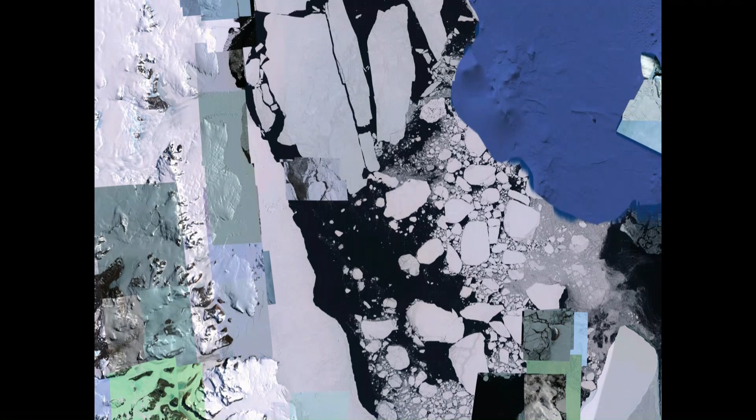But the sound could also be interpreted as a territory's response, or in a way the lament, to anthropogenic climate change, as it amplifies and echoes the sound of the formation of crevasses, and of the calving of ice that we all know is one of the quintessential markers of climate change.

Tonight it is a real honor to introduce to you an architect that has accepted the challenge of building on this living ice. A colleague who has understood that human presence in Antarctica, an achievement approaching its 200th anniversary in 2020, is essential to be in the position of building accurate scientific models that allow for reliable predictions of the future of our planet, and has therefore collaborated with countries and their respective scientific organizations to build scientific stations on the continent.

I'll refrain here from indulging in too long an explanation of the extraordinary site in which Hugh Broughton and his team have been working and operate daily, but I'd still like to show a few diagrams which were produced by some of the students I see here in the room tonight within the context of the recent AA Polar Lab workshop we conducted in collaboration with Accurat.

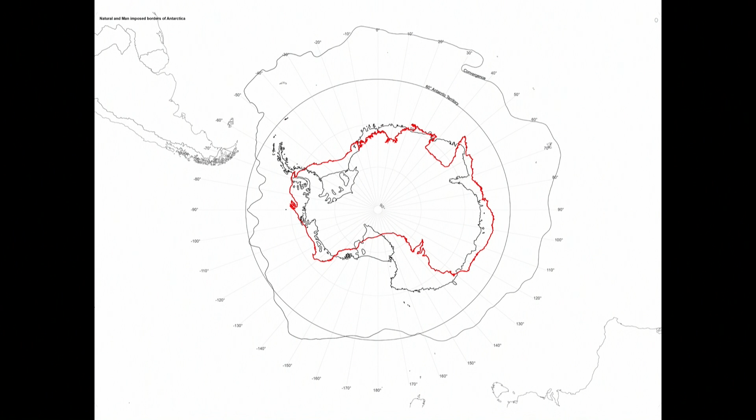Antarctica, really briefly, as you can see, is almost as large as Australia. Its territory is defined geographically by the convergence, which is ultimately a current, where the cold waters of Antarctica meet the slightly warmer waters of the sub-Antarctic. And politically, it is defined by the latitude south of the 60th parallel.

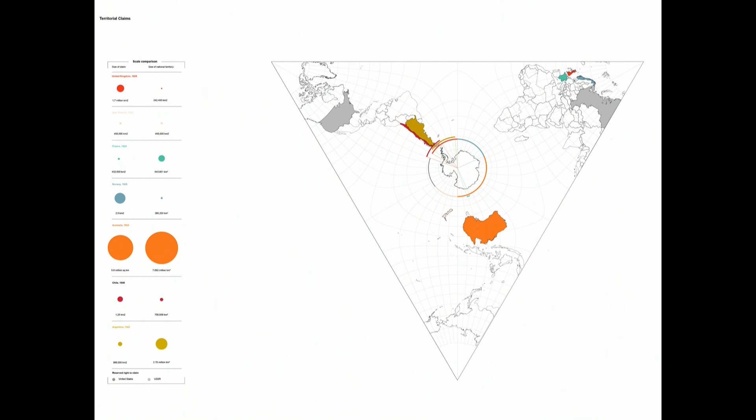The national claims that were made by 7 countries between 1908 and 1942 are somehow suspended since the signing of the Antarctic Treaty, which is effective since 1961. Here you see a first attempt at diagramming its operation, but basically it's a fragile governance system which prescribes that Antarctica is a territory devoted solely to science. There's no military activity allowed, and no resource extraction either.

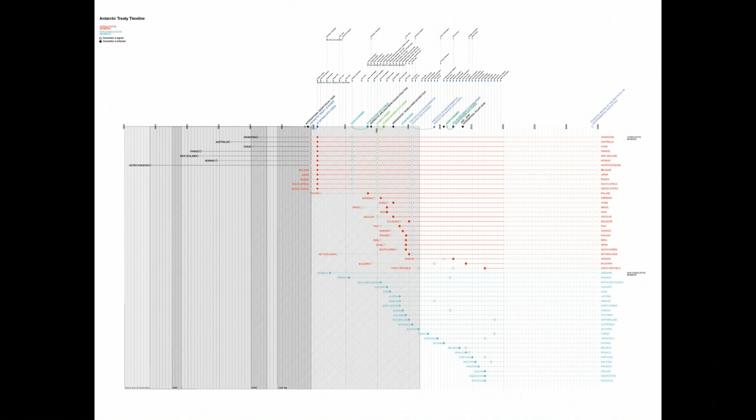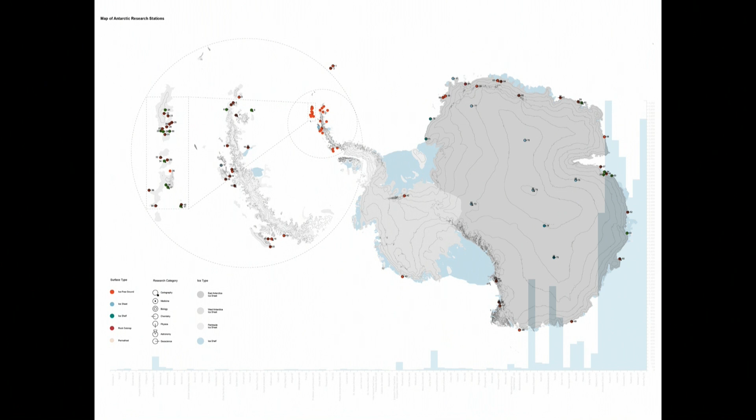But during these past years, 53 nations have in the meantime embraced the Antarctic Treaty system, leaving approximately 143 countries still unrepresented. The territorial footprint of these national investments is manifested in 77 research stations that you can see punctuate the continent, mainly on its coastline, but also within the middle of the territory. And most of these have been rebuilt or extended throughout the years, as this timeline attempts to show.

And most of them have also been built in proximity to historic sites and monuments, which are marked here on the map, and their respective protected areas. Some of these include, obviously, the heroic era huts that you might be aware of, Shackleton and Scott, just to name a few, but there's also a rather eclectic list of other artifacts which are part of this preservation list.

And yet most of the stations vary in typology. It depends primarily on the altitude where they are located, the climatic condition, and obviously the ground, or in some cases the ice, in very rare cases ice sheets, as we'll see with Hugh tonight, upon which they are built. They also vary in size and programmatic specifications, as well as number of buildings.

You can see on the upper left, for example, McMurdo Station. It's a US station. It's arguably a small town or a small city. It has many buildings. In total, there are 1,289 buildings in Antarctica, which account for a total surface area of approximately 211,000 square meters.

So let's say 3 Louvre, just to give a scale comparison. And all in all, they can host up to 4,800 people during the summer months. But how do these researchers live? How can architecture provide more than a temperature-controlled environment that allows for survival in such an extreme condition?

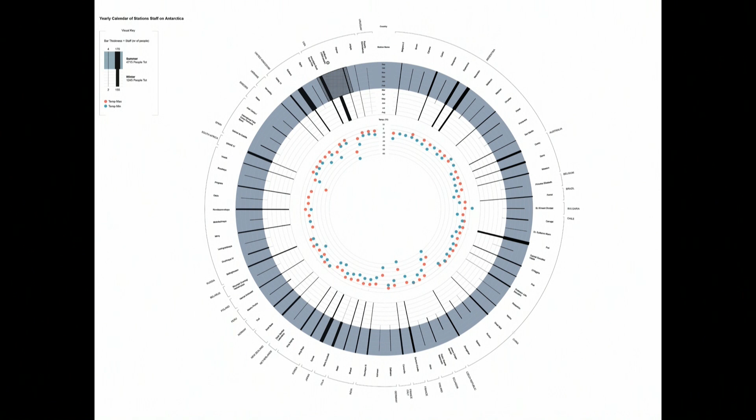So all of these questions were certainly answered or posed within Hugh Broughton's team and addressed while building Halley VI, which we will certainly see tonight, for the United Kingdom, Juan Carlos I for Spain, while redesigning or designing Comandante Ferraz for Brazil and Jang Bogo for Korea, and rethinking at present the Scott Base for New Zealand and expanding it, as I just understood, and Rothera again for the UK.

But given the trajectory of the Anthropocene and the ever-increasing possibility that humankind might have to inhabit exponentially inhospitable territories, I believe it's really a true pleasure to have tonight the opportunity to invite Hugh Broughton to share with us his experience on Antarctica. The unconventional brief that Hugh was confronted with offers new perspectives to our discipline and encourages the development of experimental prototypes, of which here at the AA especially we're immensely fond.

So it's a very real honor to invite Hugh up on the stage now to contribute not only to launch the AA Polar Lab session and conversations, but also to contribute to the new canonical history series of the AA. Please join me in welcoming Hugh Broughton.

Thank you so much. That was such a nice introduction, and I actually have to admit I learned quite a lot during that, so that was really cool as well. And some beautiful, beautiful diagrams as well of all the different stations that I could imagine will be very useful in some of our presentations in months to come.

My brief this evening is to talk to you about the extreme challenge of building in Antarctica, drawing upon some of the experience we've had over the last, it's now 15 years since we very first became involved in the Halley project, and then working on other projects since. Of course, I'm sure you're all aware, Antarctica is the coldest, windiest and driest of the continents on Earth, and yet holds 90% of the world's fresh water within its region.

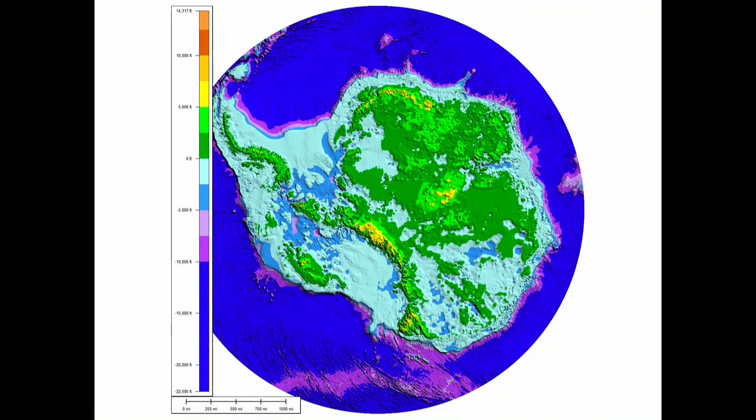This is in fact an aerial view of the Antarctic taken by NASA, and you can see those areas which are green, which hold land underneath, and those areas which are light blue and darker blue, which are essentially ice shelves, which is thousands of year-old ice frozen between the land masses. And there is a popular thing that you can do looking up on the internet, what happens if all that ice were to disappear, and this would be the archipelago that we would be left with.

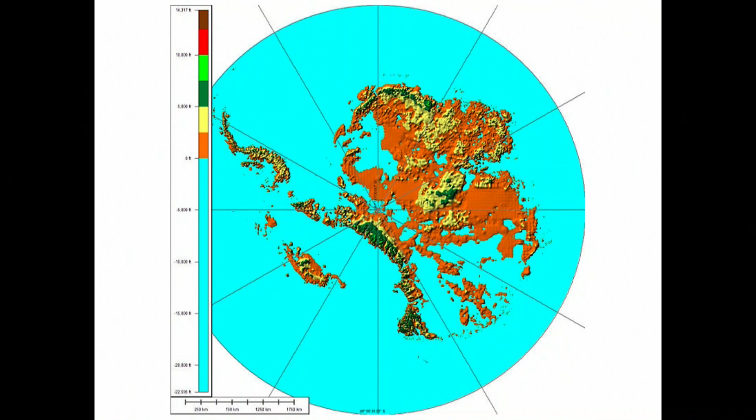The reality is that if all that ice melted, then sea levels in the world would rise by around 60 meters. But the safe aspect of that is that it would take in excess of 5,000 years for all that ice to melt. So it's not something that any of us will probably experience. But what we may experience is the demise of large sections, and in particular the Western Antarctic ice sheet, which is one of the most dynamic in the Antarctic continent, and which is held in place by a series of glaciers that, if they were to disappear, would allow the ice sheet itself to start moving at great speed into the ocean. And that in itself could lead to sea level rises of around 3 meters, which may not sound so much in the context of 60, but certainly would have a significant effect around the world.

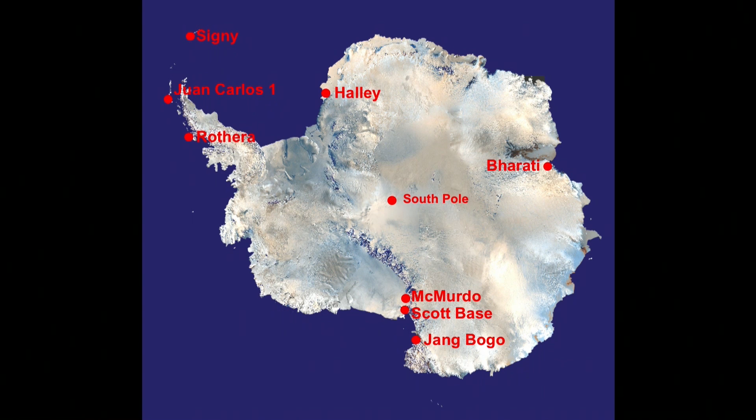From our own perspective, we've been very lucky to be involved in a series of different stations at different levels. Most of them have involved some degree of architectural competition, and probably more than half of those we've lost. So it might look like a lot, but actually in the end there is certainly a good chunk that we have been involved with, but others which we've spent months and months preparing proposals for that have then led to other people building them.

The one I wanted to focus on in particular is the British station, Halley Station. We designed Halley 6. That's because there were 5 before, most of which disappeared. They were either buried or the last one had to be dismantled. Halley is a really unusual location.

And the other 2 buildings, the Piggott and Simpson platforms, were where the science was conducted. So one did near ice science, and one did atmospheric and outer atmospheric science. And one of the key social issues of the base was that there were 2 groups of scientists studying relatively related subjects, but working totally independently. And that was, alongside the technical challenges, one of the social challenges that our project presented.

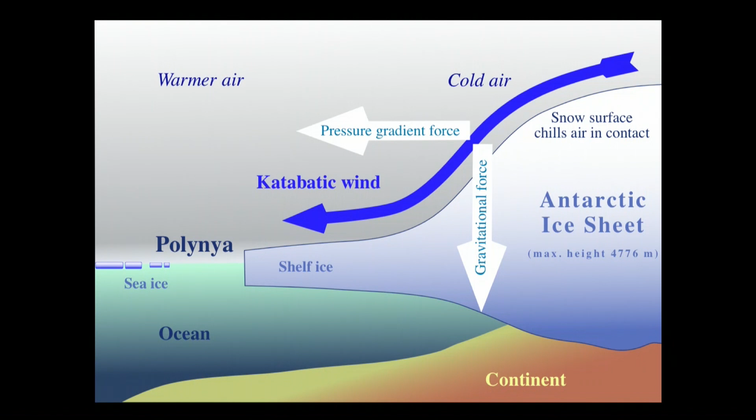So the challenges of building in the Antarctic are obviously pretty apparent, the coldness in particular. Temperatures at Halley go down to around minus 55 degrees Celsius. There are other stations that are colder. Vostok Station, for example, I think has had temperatures down to at least minus 90, and at the South Pole also there are temperatures in the minus 80s. But minus 55 is still pretty cold. Everything will freeze, your eyebrows, your breath, everything at that temperature.

In the middle of winter, the snow and ice will freeze solid on anything you leave outside, so your vehicles that you're using in the summer become totally unusable in the middle of the winter. And then in the summer, when the temperatures rise, the regularity of high winds also increases, and wind speeds at Halley in excess of 100 miles an hour, or around 150 kilometers an hour, are not uncommon. And they will carry significant drift with them.

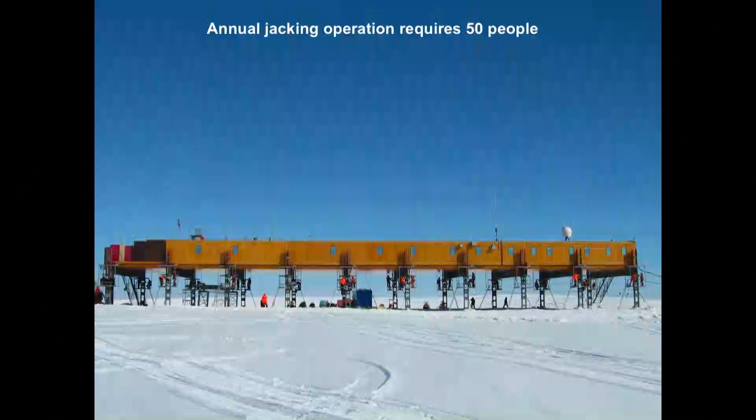So every year at Halley V, it was necessary to jack the building up to account for the rising snow level of 1.5 meters. And the way that that was done is that they would create baskets using scaffolding tube around each individual leg, and then there were small electric engines that would then be put on the legs, and they would just jack the steelwork up within that leg, and you would have to put bolts in, then jack it a tiny bit more, put the bolts in, move them up, jack it some more.

And it was a really laborious process. Took at least 2 or 3 days just for this building, and a day each for the other buildings, but involved every single person on base. All science had to stop, all other operations had to stop. Obviously, you're working with steel bolts and things. When we went on a visit, we had to help with this process. And it was really time-consuming and extremely cold. Fine when the sun is shining on you, but the sun tracks around the building. And when the sun moves off, then you get incredibly cold when you're doing this process.

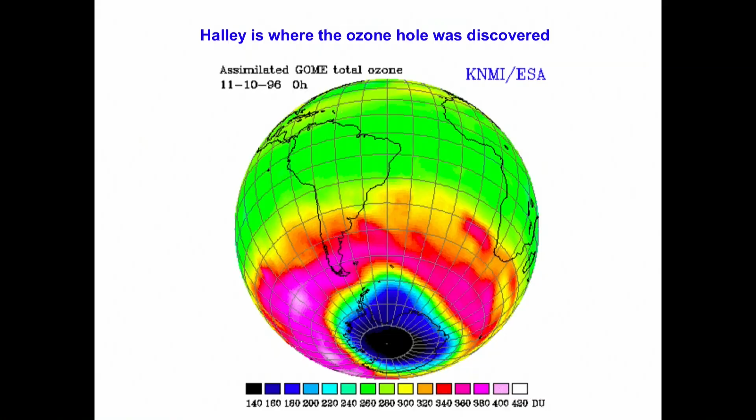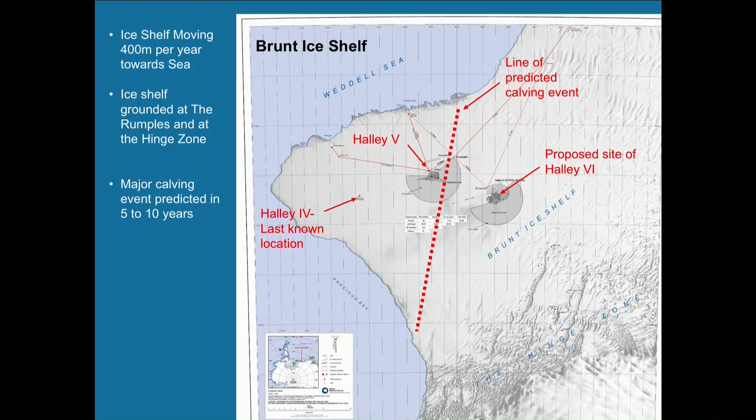And as a consequence, the British Antarctic Survey decided to hold, it was a first for them, an architectural design competition for the new station. So they put out an international call for multidisciplinary teams to come up with combined engineering and architectural solutions. And they had around 90 entries initially. It was quite funny because at the time we were just a practice of 4 people, working out of a small shed in West London. And I remember hearing on the radio about the requirements for the architect they were looking for. They had to be multinational, multidisciplinary, world leaders in sustainability, world leaders in prefabrication. And I remember listening to all 4 of them and thinking, well, that's so straightforward, because I am not able to do any of those things.

But still, I went along to the launch, and I met an engineer from AECOM, who many of you may know is a big global engineering consultancy. At that time, they weren't into architectural competitions in any way. And he sort of pleaded with me to enter with us, and I pleaded with him to let them lead the bid, which eventually they did. And we were really lucky. We found an engineer based in Colorado Springs in the US who had spent his whole life working on the American polar program.

And we paid for him to come over to the UK for 48 hours, and he gave us a kind of crash course in all the things that you should and shouldn't do in Antarctic design. And he made sure that our naturally ventilated building with wide opening windows bit the dust as quickly as possible. And eventually we got the core basis of a design together, and it was, I guess, from that springboard that we eventually won the competition.

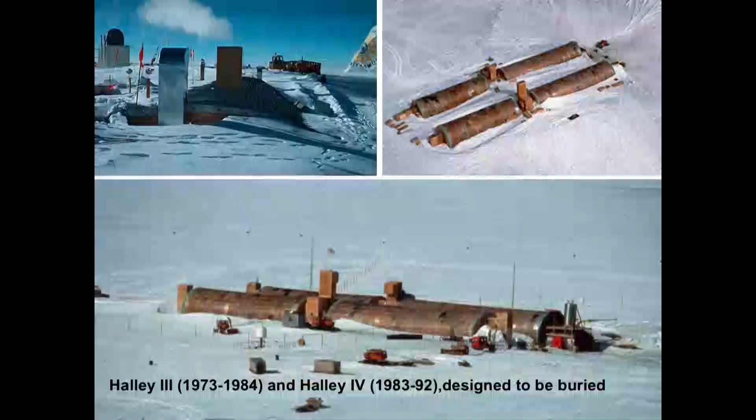They then decided, because their buildings are getting buried by the ice, the best thing would be to design buildings to be buried. So Halley 3 on the top left and Halley 4 were both built as tubes which could be buried by the ice, but they had very, very short lifespans, primarily because the ice on the Brunt Ice Shelf is so dynamic and moves in a way like water, and the ice just crushed the buildings.

You also have to just imagine what it would be like having to climb down to where you live, down a ladder in one of those tubes. Imagine the smell of the sewage, of the generators, of the old food, no views out of the building. It was a pretty inhospitable place to live.

More recently, there have been some more dramatic and contemporary structures built in the Antarctic. Probably the best known of all is the Buckminster Fuller Dome at the South Pole, which was a geodesic dome within which structures were placed and which was removed only around about 15 years ago.

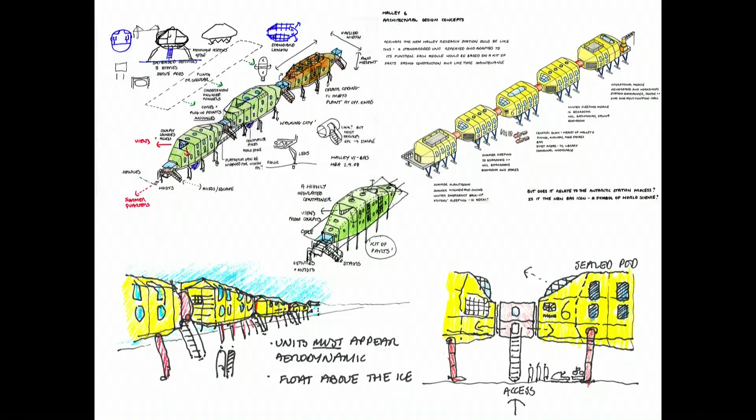So we had to break with this concept of a big structure on hydraulic legs and divide it down into a series of modules, each on hydraulic legs and each supported on giant skis, so it could be disconnected from a line and moved to a safer place inland if ever there was the threat of the site disappearing on a giant iceberg.

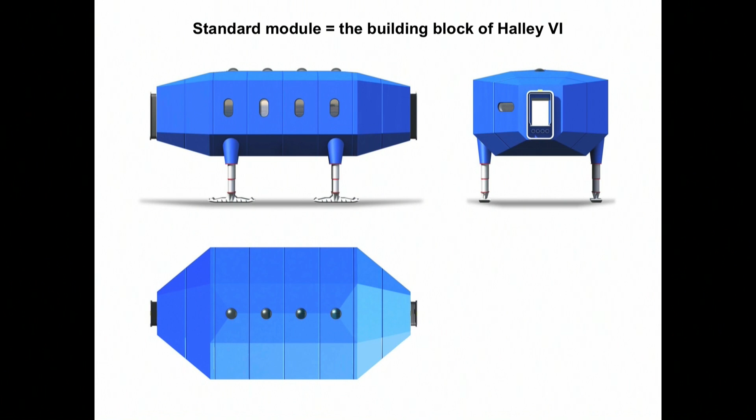So we came up with this concept of standard modules of 160 square meters each, weighing between 80 to 100 tons, which could be used for science, they could be used for office spaces, they could be used for bedrooms. There's 8 bedrooms in each one of these modules.

The bedrooms are all bunk bedrooms, so that in the winter everybody gets their own room, and in the summer you share a room. The idea with the bedrooms was that they should be reasonably comfortable, but not so comfortable that people kind of hide away from the community, because you want to try and bring the small group together to support each other. And then just with simple things like good natural lighting, good artificial lighting.

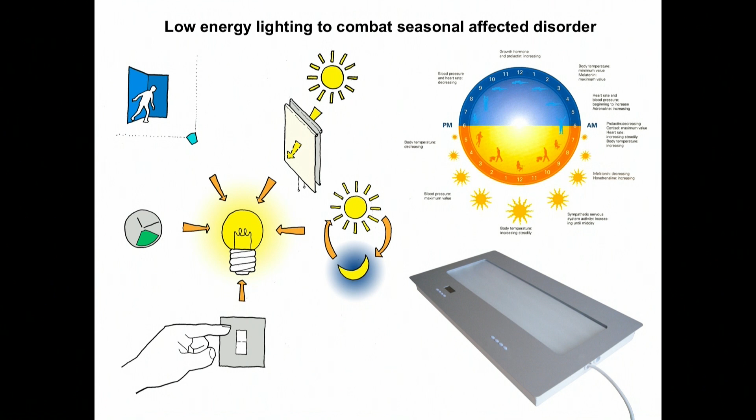So we worked with our lighting designers and with Philips to develop an early version of a kind of SAD lamp with an alarm clock function to help reset people's biorhythms, boost their serotonin production so they don't suffer so much from the winter blues. We also worked with Angela Wright, a colour psychologist, who helped develop for us a special palette of colours for use within the building, again to try and address issues to do with seasonal affective disorder.

And we then exploited what natural light there was, particularly in the summer when you get great natural light, to make sure that even though the buildings might have to be arranged in a line to respond to the prevailing wind and the potential for drift, nonetheless each one of those buildings could, in a very simple architectural way, become a kind of destination in its own right.

So we widened out the circulation, we used the colour to define one module over another, and we also raised up the ceilings to allow natural light through the roof so that you get these kind of well-lit hearts to each one of the buildings. And then as you get to the transitions, the circulation narrows down, and then there are points at those transitions when you can then look out onto the icescape all around.

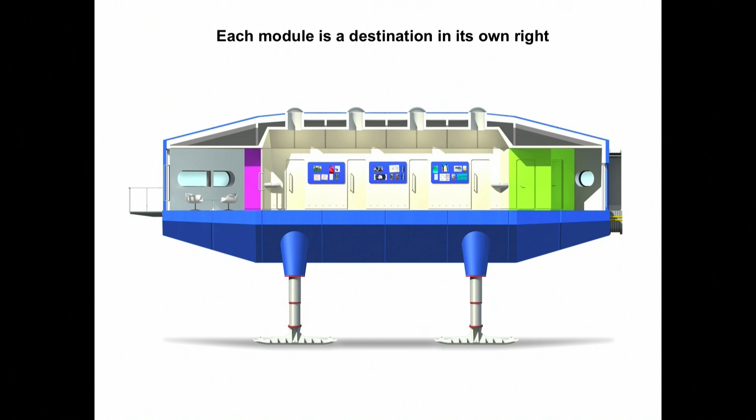So the buildings actually narrow down for multiple reasons. A, so you can get the views out. B, for aerodynamics. And C, so that the linking pieces between could be kept as small as possible because they were very expensive to develop.

The modules all have a base structure which is a steel space frame so that all the building services can run through that zone and be kept within the insulated envelope. And then there's a perimeter superstructure so that within the buildings all the partitions can be reorganized in the future, because the building has an expected lifespan of 25 years, but the science programs change every 5 years, so you want to be able to reconfigure the interiors on a fairly regular basis.

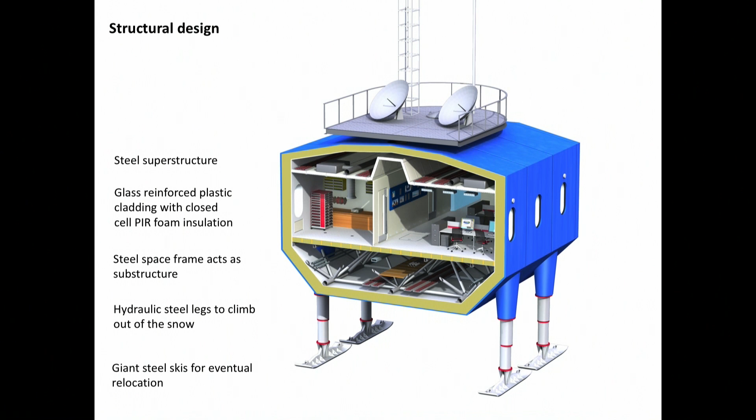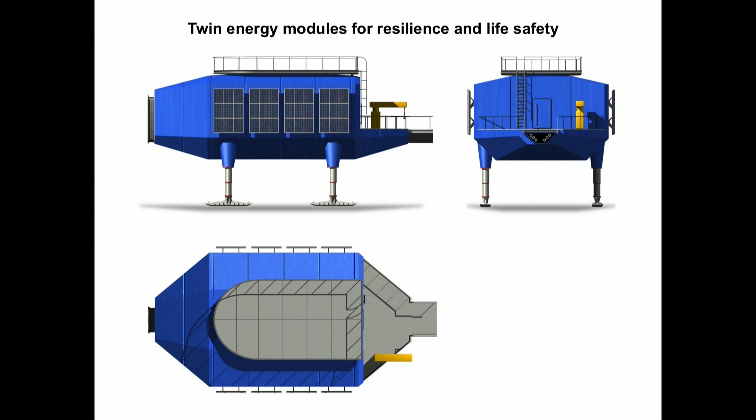The same modular approach was used for energy. So we have 2 of these energy modules which contain the generators which create electrical power and the heating. And we have 2 so that if one breaks down, then you can rely on the other. And alongside the power generation, they have things like water production plant, sewage treatment plant, fire suppression systems, waste treatment facilities, that kind of thing. And here you can see some of the services running through that space frame substructure to the buildings.

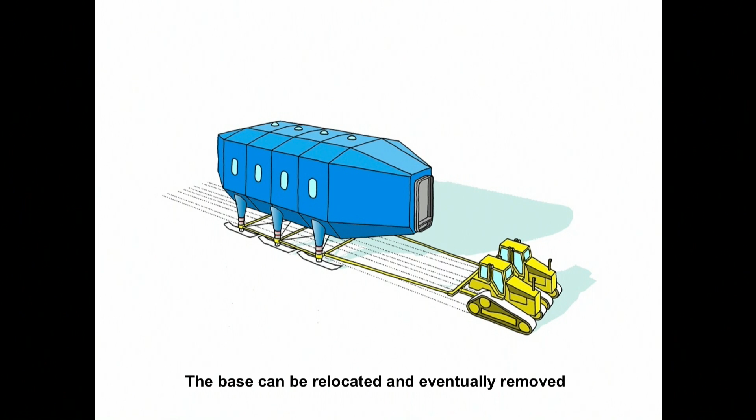And the idea of being on the hydraulics was that when it came to relocation, each module could be lowered down on its hydraulics and then dragged using the skis, using bulldozers to a new location where the station could be re-established. So through that whole concept or methodology, we were able to accommodate all the requirements of our brief for science facilities, for sleeping spaces, working spaces.

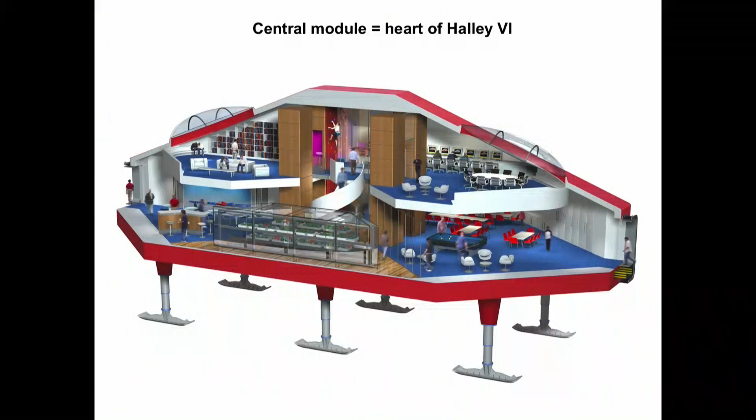But the one thing we couldn't accommodate was the primary living space. We wanted a place where you could have the dining, recreational facilities, the kitchens, where everybody could come together. So for that, we developed a special two-story module, weighing up to 200 tons and arranged on 2 floors, which had open plan space for dining, for the bar on the lower level, and then quieter cellular spaces on the upper level for watching TV, internet access, the gym, and so on.

And this was a drawing from the competition stage, where we recognized that all these people working in the Antarctic were really into the outdoors. So we thought, well, we'll give them a climbing wall to go from the lower level to the upper level. And then it was at that point that the health and safety officer from British Antarctic Survey pointed out the proximity of the bar, and a vote was taken on whether it would be climbing wall or bar. So the climbing wall bit the dust, unfortunately.

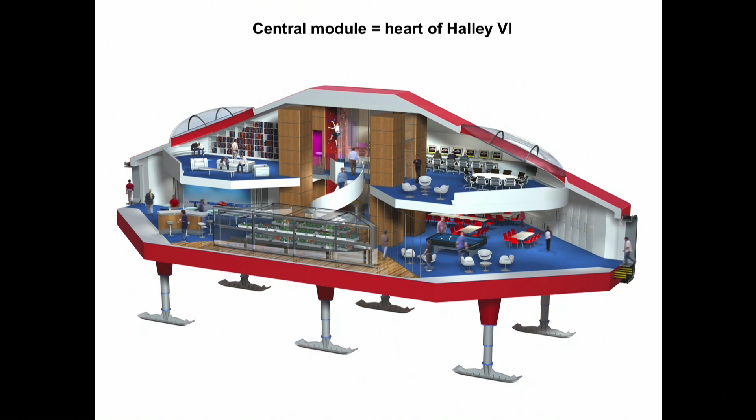This is the arrangement. So the building is arranged in a straight line because the predominant wind blows 95% of the time from the east-northeast. So the buildings are in a straight line so that the wind blows underneath the modules and then creates drift on the leeward side that you then don't have to bulldoze. And it's split in two so that if ever there's a disaster on one side, you've got somewhere to escape to until you can be rescued. And as it could take many, many months to be rescued, you need decent facilities in which to stay safe.

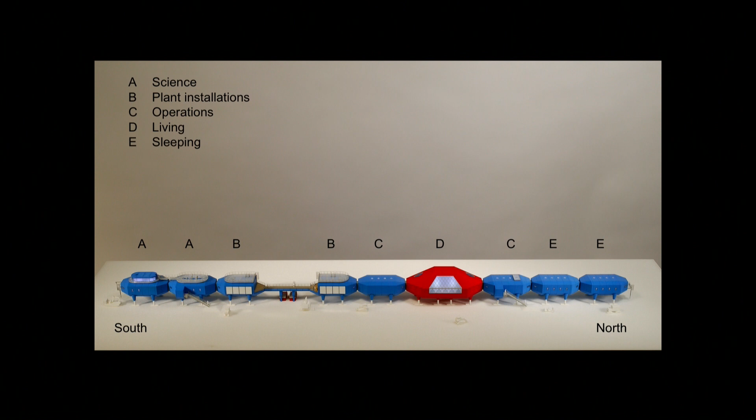So on the left-hand side, there are 2 science modules and an energy module. And on the right-hand side is the living space and another run of the energy modules. So there's that split with a bridge link. The idea originally was that it would be just for operations and maintenance, but actually the scientists, even at minus 55 degrees Celsius, in their T-shirts and shorts, will do the 25-meter dash from one side to the other as part of their induction to working at Halley.

In terms of the envelope for the buildings, one of the things always impressed upon us is that in the Antarctic, what you don't want to do is be inventing things for the first time. It's fine to come up with innovative ways of combining existing concepts, but it's not a great idea to use the Antarctic as a guinea pig for something, because the people who are there have no recourse to any other form of safety. If something goes wrong, they are stuck there.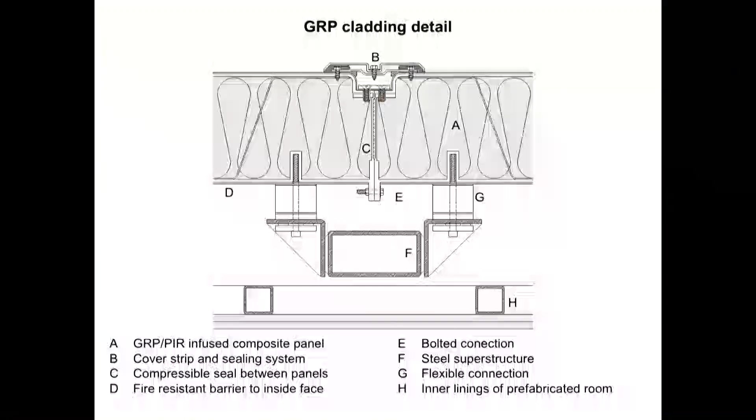The principle of the base, however, is that it would be really well insulated with very low levels of air infiltration. It would use a vacuum drainage system to significantly reduce the amount of water usage, so that flushing the toilet takes only 1.5 litres of water compared to 9 litres in a standard toilet. We'd have sewage treatment systems, which meant that the sludge could just be incinerated and otherwise the clean water could be dropped back in the ice.

We used combined heat and power generators so that the heat that's given off to make electricity is used to heat the building. So every step along the way, we were using existing technologies, but in new ways to really drive the sustainability of the base and above all, drive down fuel usage. And that's been one of the great successes of Halley, reduced water usage and reduced fuel usage per square metre compared to the previous station.

So in terms of the construction, before we started out on site, we needed to do loads of testing because it's one of those places, if it goes wrong, then you are really screwed for a long time. So much so that you may have to abandon the whole summer season of construction until you can sort your problems out and come back the next year.

So one of the key things, of course, with Halley was proving the relocation strategy. So we had this test sledge made, loaded it up with cranes, tried the skis in different formats, tried pulling it with the bulldozers, and then when we were happy, that determined one of the key elements of the design, which was the positioning and the size of the skis. We had loads of samples made of the cladding to test its ability to resist the high winds and the sort of sandblasting effect of the ice, but also thermal shock.

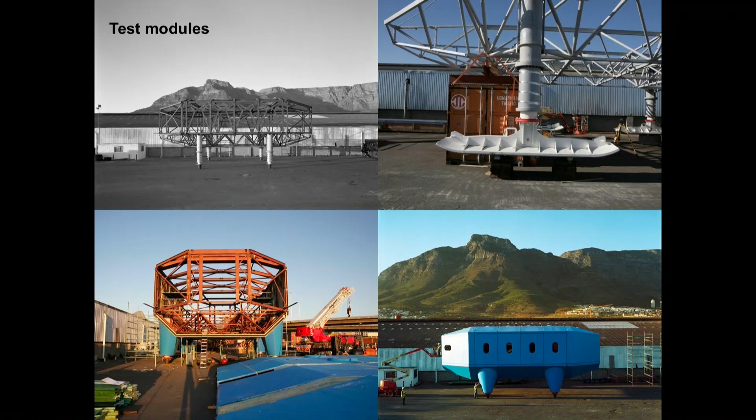And then finally, we built test modules. So this is one of the standard blue modules where we put the frame up, we put all the cladding on, loaded it up with tanks of water to simulate the actual finished weight, and then tried out the hydraulics. And then we did the same with the big red module.

And this is it, and it just shows the benefits, because you might see just to the left of the window there's a kind of panel out of alignment, and so we were able to strip that off, get it reset, put it back on again very easily in Cape Town where the cladding was made, but it would have been a disaster if we'd discovered that in the Antarctic.

This photo was quite fun because literally just as I was taking it, I heard this massive big crash, and I thought, oh my God, one of the panels has fallen off on the rear of the building. So I went rushing round, and in fact what I discovered was that there were 2 cars rubbernecking the building, and they hadn't noticed that they were actually on a collision course and just smashed into each other. And it was a very odd sight in a sort of low-rise residential district in Cape Town.

So once everything was ready, everything was brought together in the docks in Cape Town, loaded onto a Russian ice-strengthened cargo vessel, the Amderma, where it was then sailed for 15 days across the roughest seas in the world until it arrived at the edge of the sea ice, where the largest component, the space frame of one of the modules, weighing 9 tons and with some special skis and smaller legs attached to it, was unloaded and then dragged using big plant across the sea ice up onto the ice shelf.

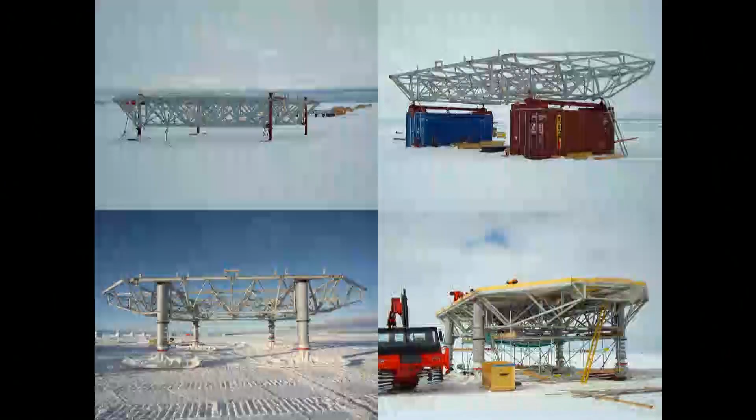And here you can see some of the first steps of the construction. So the top left, that's what arrived at the site, and then it was lifted by crane onto some shipping containers, and then you were able to insert the hydraulic legs and the skis, which act as the means of relocation, but also the foundation.

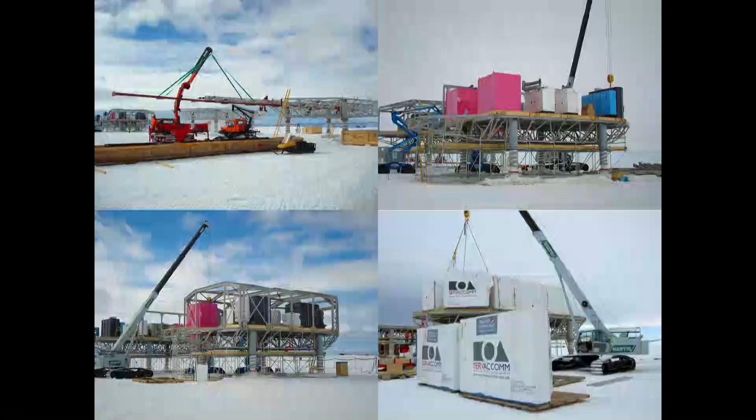Those couldn't be installed to start with because they're really heavy. And then from that position, the prefabricated floors were installed. Then we inserted prefabricated services. All the generators and the fuel tanks went on. Then the superstructure. Some of the other buildings, we had all prefabricated rooms. So we really made the most of prefabrication on this project as we absolutely could.

And one of the bizarre things when the building finished and I did the snagging is there were just no surprises because we had seen absolutely everything in factories around the world beforehand. Here you can see some of the modules in a line. So it was made next to the site of Halley V so that the construction crew could use the existing base to sleep in and for eating, and also benefit from the use of the British Antarctic Survey's doctor and so on.

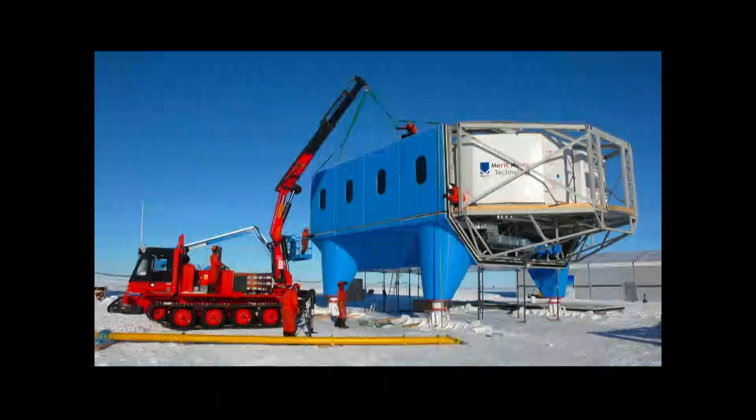Once all the interior prefabricated rooms were loaded on, then the superstructure went on, and then large cladding panels, and this is one of the largest going on, so it's the whole sidewall of one of the modules, which is around 3.5 meters high and around 10.5 meters long, all with the glazing installed, triple glazing, with very high degrees of solar coating to stop glare from the ice. And here you can see the big red module, with some quite delicate construction going on here, which is a big glazing element to the centre of the building.

The buildings were built in a way like you would fabricate a car. So we had a team doing steel work, another team doing cladding, and then one team dedicated to the red building, and then eventually moved into the different phases of the interior fit out. And then when the buildings had all of their exteriors finished and the interiors probably 50% finished, they were linked up to bulldozers, dropped down on the hydraulics, and then dragged 15 miles to the eventual site where they were all linked together. And that's the view of the big red module moving off to site.

And Monday morning arrived. This is a video showing that relocation.

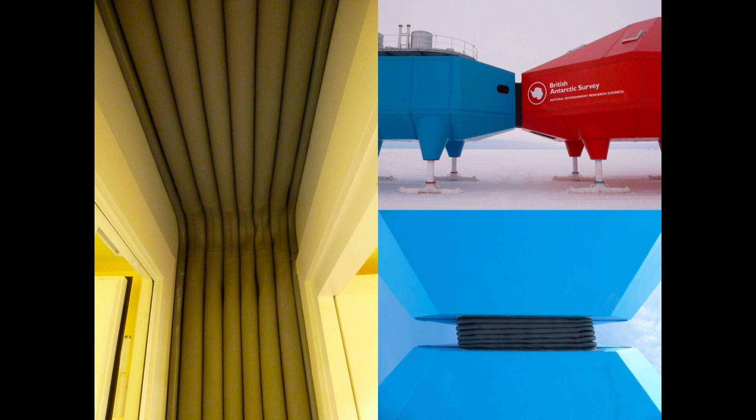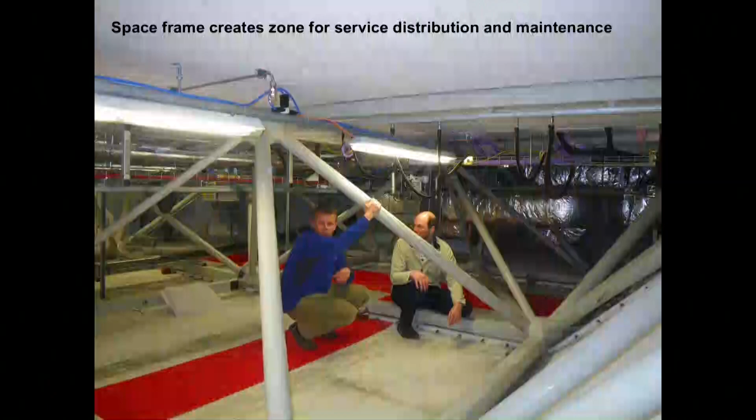The connections between the modules are flexible, to account for settlement, but also as you lift one building up next to another. And we got these made by a company that normally make connections between train carriages, and they make them in the Arctic to go down to around -50. And so they have microfoil insulation in. This is within the actual space frame itself, checking all the services. Just a view looking down on the building.

And this is the south end, which is the science modules. The southernmost of the buildings actually has an observatory on it, which is for checking the weather. And it's also where measurements of ozone are taken. So this is within that observatory where they're continuing the measurements of ozone, which the depletion remains, but the level of depletion is decreasing. And that scientist there is using a Dobson spectrophotometer to carry out those measurements.

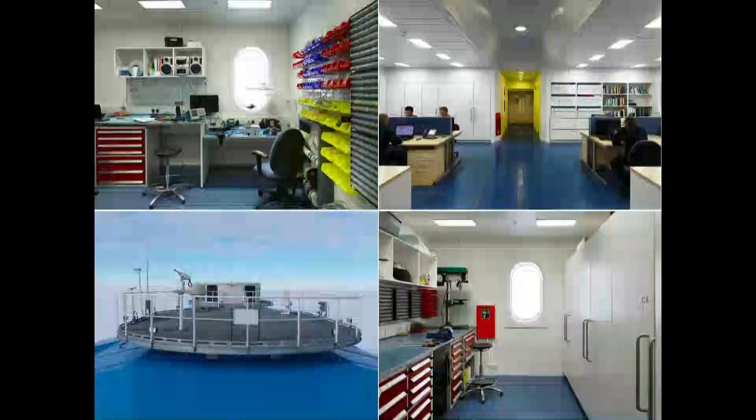This is within some of the science spaces. So it's a fairly robust working kind of space. Very flexible. You need to be able to add science equipment, take it away according to what experiment is being carried out at the time.

In terms of the water production at Halley V, it used to be a bit of a team bonding event because you would have to go out with shovels and you would shovel the snow down a hole into a kind of buried giant kettle to create all the water that was needed for washing and for drinking, which was kind of quite good fun on a summer's day. It wasn't so good fun in a 100-mile-an-hour wind when people had to wear helmets to cope with the blasts from the ice.

In the new station, it's much simpler. There are these 2 tanks. They have a hydraulic lid. The snow is pushed in. It melts. There's 2 of them, so that if one fails, then you can keep the other one going. The MT stands for melt tank, but I only afterwards realised how ironic it was that a water tank should be called empty.

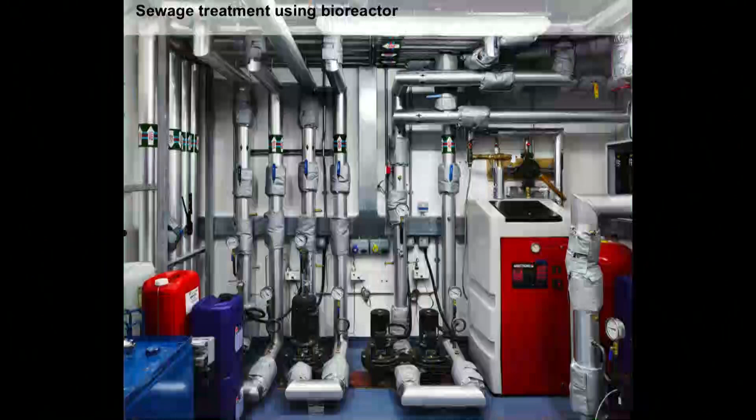These are the toilets. So we have a vacuum drainage system like you get on an aircraft or on trains, which saves an enormous amount of water. This is within the plant rooms where the sewage waste is treated in a bioreactor, and the fresh water can just be dropped back into the sea. This is the main living module.

So the white glass is actually a highly insulated glass using nanogel, so it has a very good level of thermal resistance. And then the black glass is actually the clear glass giving views out. Dining spaces. The dining spaces had to be designed so that they suit a sort of summer population of 60 or 70 people, but don't sort of overawe you when there's only 15 of you in the winter. There's a pool table. This is within that glazed space. So the bottom triangles are actually clear views out onto the ice. And then there's a staircase within a timber cylinder that rises up to the upper level.

The timber cylinder is lined in Lebanese cedar because it's one of the few veneers that gives off a sort of pleasant smell. So we're always conscious of the sensory deprivations that people have in the Antarctic, and smell is definitely one of those. And the royal family, of course, is another one. So we made sure there was a picture of the Queen. This is the spiral stair leading up to the upper level. And then here, one of the quieter spaces for watching TV or playing games and so on.

And then as you come along to the north end of the station, there's sort of office and control spaces. So this is the air traffic control and operations hub. There's a doctor's surgery with an ability to carry out small operations up to an appendix. The doctor also is trained as a dentist. These are the corridors with natural light coming through those holes in the roof there, and you can see the use of the colour.

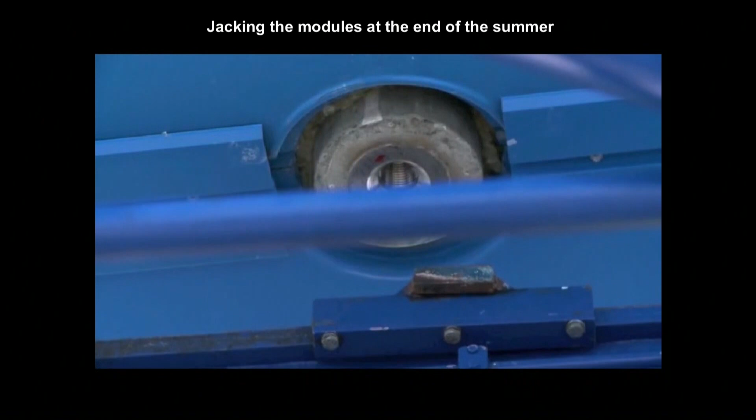And then this is the process of jacking the modules at the end of the summer. Next, the modules are dug out in preparation for jacking. The jacking frame is brought in. Snow is infilled under the ski. Extending leg 1. The ski is then placed back onto the heap of snow. This continues all the way along the length of the station.

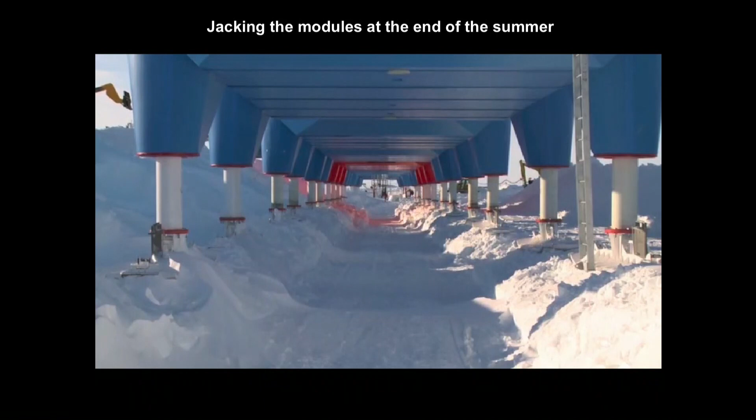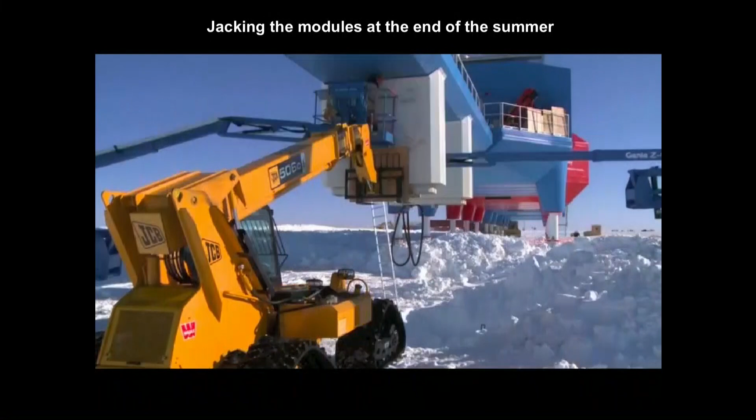Once all the legs are up, the first jacking takes place. Then the process is repeated for the second jacking. And the melt tank is placed back in. And there's the view of the station, fully elevated, ready for another winter. And here we see it in the middle of a winter, so you can see the rising snow level on the right-hand side and the big drift on the left-hand side.

This is what it feels like at -40. Someone with a boiling kettle of water, just throwing it from that bridge link into the air, and you can see it just instantly freezes. This is a view of the station during the Queen's Diamond Jubilee, where the southernmost Britons played croquet underneath the building in, I think it was about -35 and blowing at about 50 miles an hour. They also played cricket on the bottom right.

This is the station emerging out of the winter, so covered in a hoarfrost, which is a very good sign because it means it's not losing any heat out of the envelope.

So for us as a practice, it's been very good as a demonstration of British innovation, publicity. There's a book. The book is actually on sale if you're interested afterwards. It's also been on a coin and a stamp. A coin, however, that only has legal tender in the British Antarctic Territory. So fairly limited appeal, I guess.

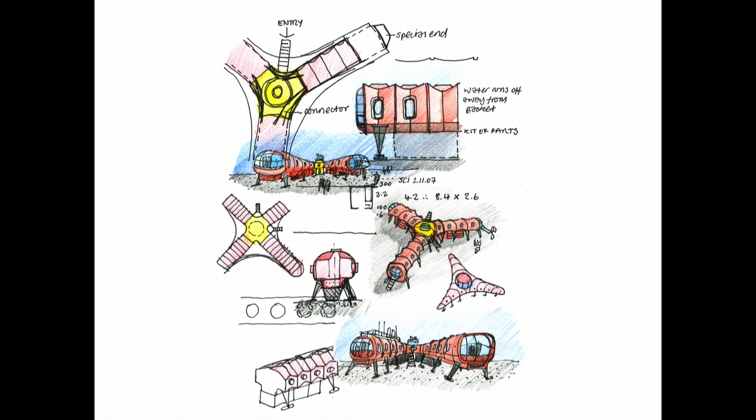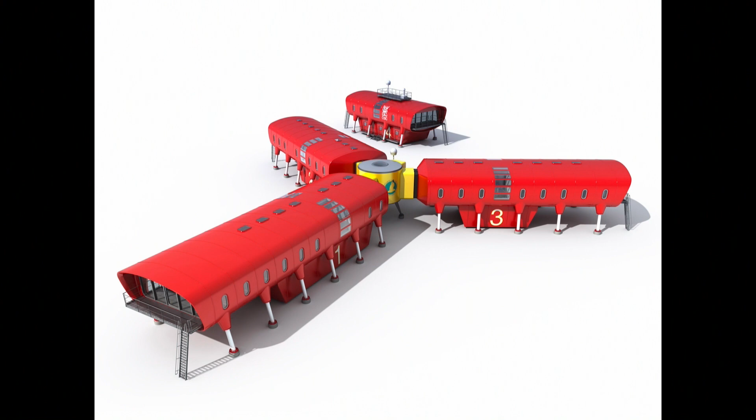And here you can see some of the earlier CGIs that we developed with a separate science building, so that provided a point of refuge if ever there was a disaster in the main habitat. And then the 3 wings connected with this central core, so everybody passes through that as not only a device for joining the buildings, but also for promoting social interaction amongst all the residents. And with big glazed elevations, so that people could really make the most of the spectacular scenery that surrounds the site.

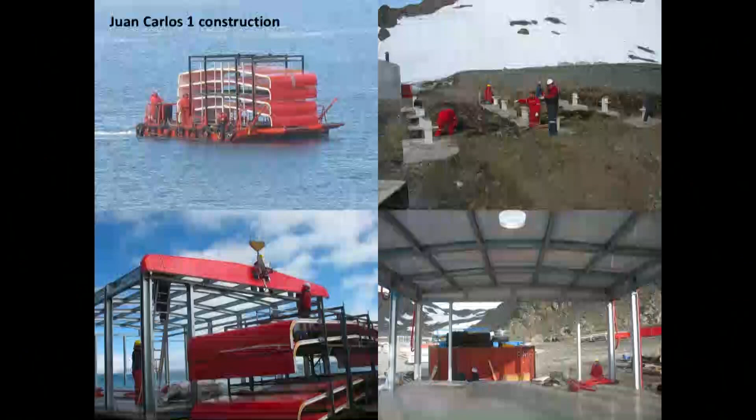Originally, we had intended for the building to be an entirely glass fibre structure, so using more of the technology that's used, for example, in creating some of the new generation of airliner. But again, that was an untried form of structure within the Antarctic, and in the end, the construction was along the same lines as at Halley, with a steel frame, glass fibre cladding. So this is some of the smaller buildings around the perimeter being constructed. And on the bottom right and top, you can see the building nearing completion there also.

We've, as I mentioned, taken part in a number of competitions. One of the most interesting, I think, was working on the Korean station, Jang Bogo. It was actually a competition in the end between Hyundai and Samsung, and we were teamed up with the Samsung team.

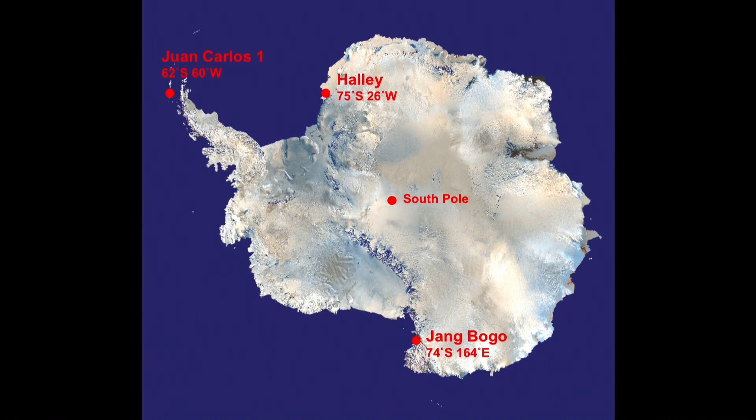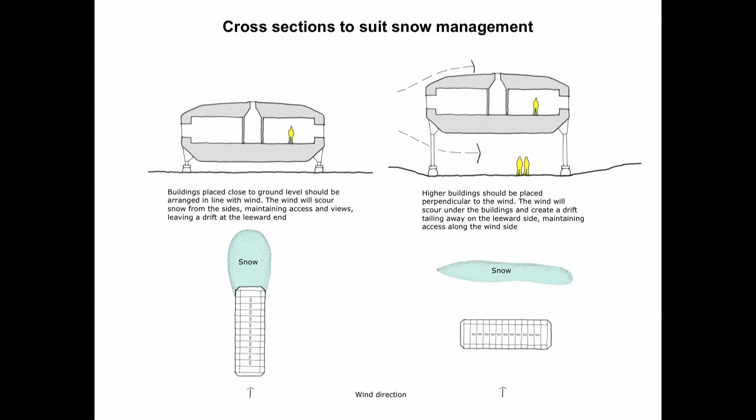The building combines the kind of basics of designing for an Antarctic station, which is that when you have low-level buildings, you want them oriented in line with the wind, because then you get a big drift just at one end. Whereas when they're elevated, you want them perpendicular to the wind, because then you get the drift set away from the building. So we combined the 2 principles. At the same time, the Koreans were very keen that the building should be inspired by Korean culture.

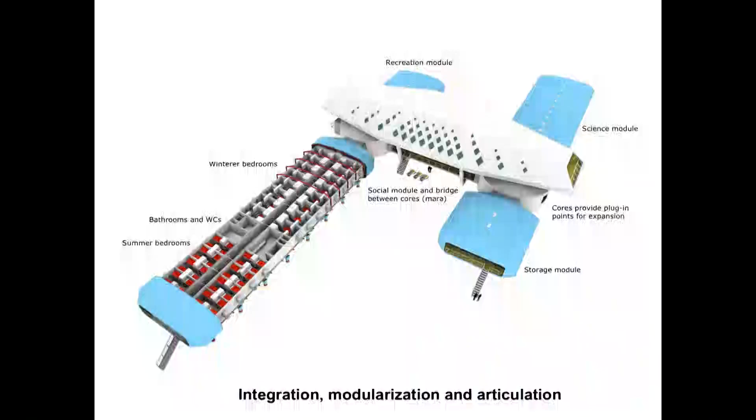So we looked long and hard at the sort of concept of gateway, to create a kind of gateway to Antarctic science, with the living space in the blue modules on one side, with the science on the other side, bridged by the sort of, I guess it's bedrooms on the left-hand side, bridged by the living space. And here you can see the kind of final designs for that project.

It's also allowed us to move into the Arctic, where we've worked with the US on the development of a research laboratory, so just a very small building at their station, Summit Station in Greenland. Summit Station is really an inhospitable site. It's hundreds of miles from the coast, about 800 miles from the coast of Greenland. There's around 3 kilometers thickness of ice at the top of the Greenland ice cap. It has horrendous high winds, again, temperatures down to -50, -60.

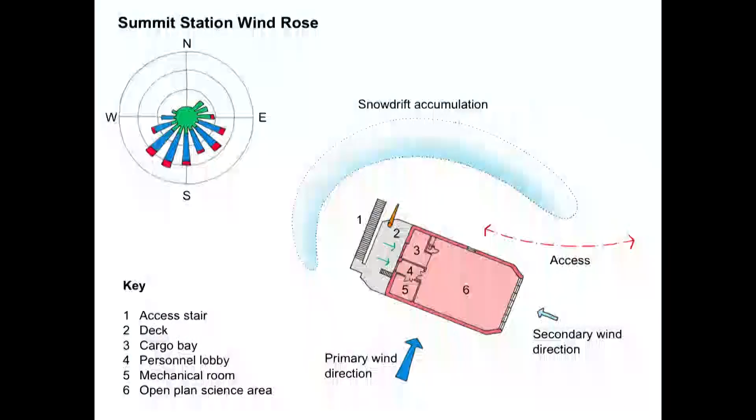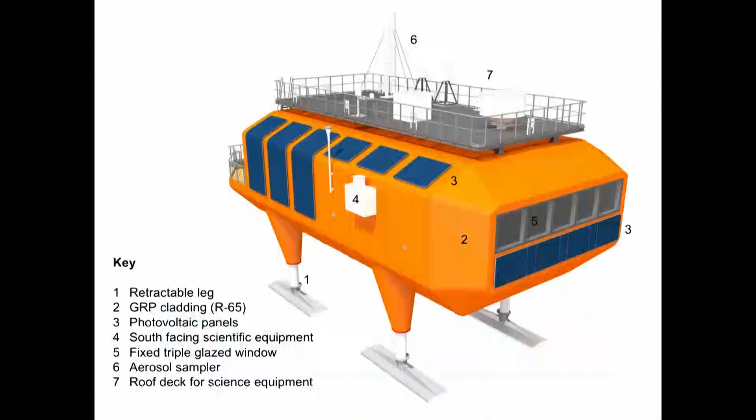Just a small crew of 4 or 5 people who actually work here during the winter, although they can be relieved by plane every 2 or 3 months. And our design was for this laboratory, which the idea again was it was elevated to allow the wind to pass underneath. So very similar principles to Halley, but at the same time a kind of development of concepts, easier cladding solutions, and just this individual building, so no need for connections.

We worked a little with NSF on ways to push the snow around the site. Because it's an atmospheric observatory, you can't have any kind of pollution next to the building, so you can't use normal bulldozers for pushing snow. So we needed to find a way of pushing it with electric vehicles, which is what NSF were also looking at at the time.

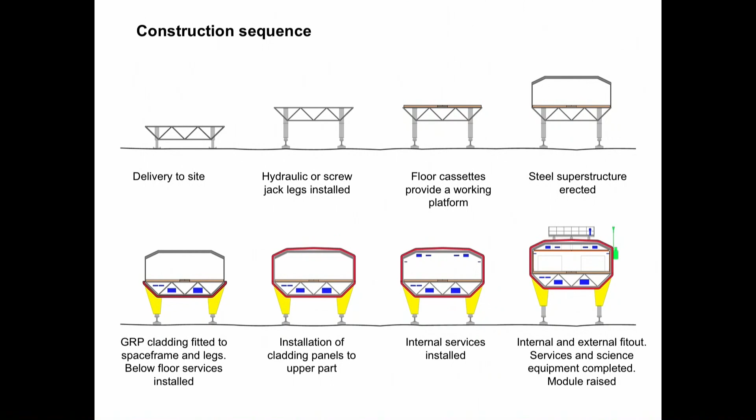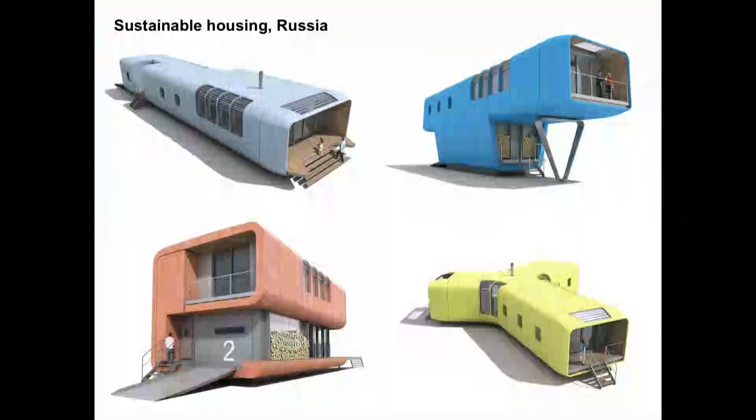Looked into the forms of construction, and then here is the final design. It actually hasn't been built, but it's still kept in the top drawer of the NSF, just ready for construction one day. And probably those principles informed other designs that we've done in the office, whether it's housing in Russia, whether it's for temporary museums in Washington.

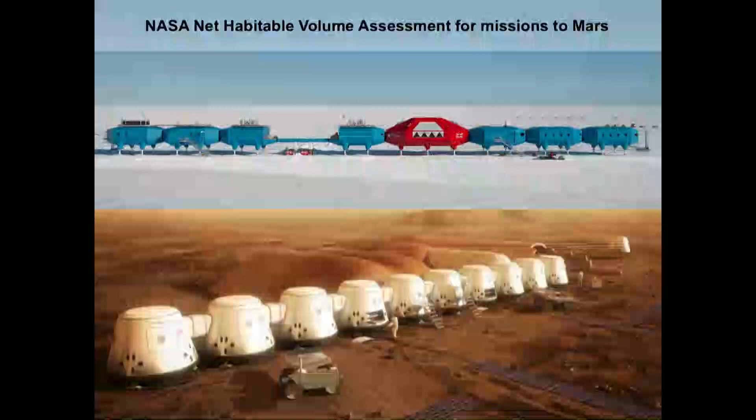Also, through the work that we've done in the Antarctic, we have ended up collaborating with NASA on some really interesting exercises, one of which was looking at the net habitable volume that might be required for an astronaut on a long-duration mission, probably to Mars, on the basis that on previous missions to the moon, people have been in spacecraft for relatively short periods, and they're really just for transit, whereas traveling to Mars, you'll be living in the module for 9 or more months.

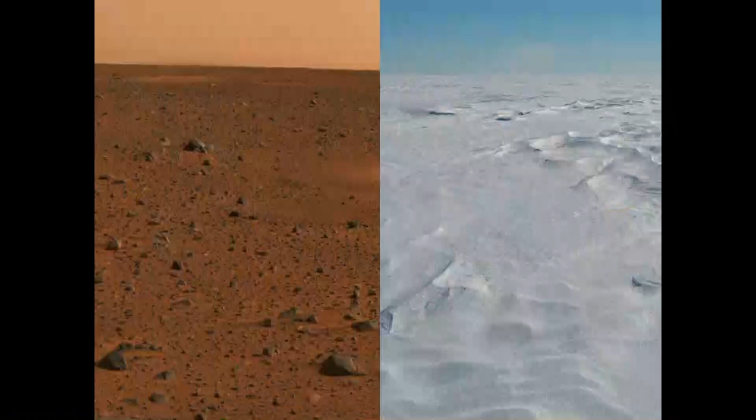The situation on Mars, of course, is very similar to the Antarctic. It's a featureless landscape. The craft that are needed to take you there are very small and determine the design through the logistic process. You have to wear very heavy and cumbersome clothing.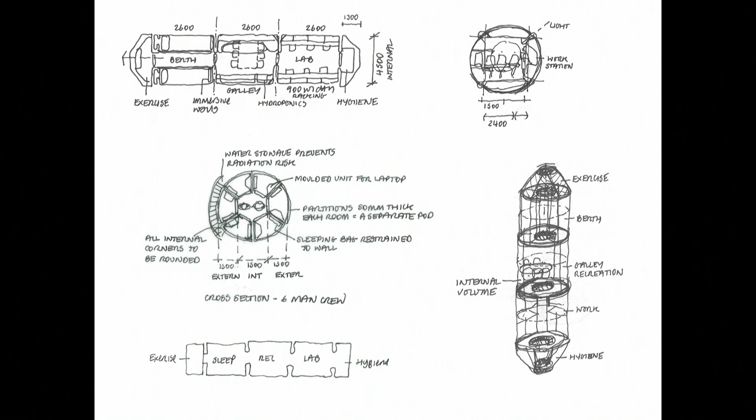And so through this process, we work with anthropologists, with doctors, with other architects, with human factor experts, to look at the base requirements for sleeping, for living, for exercise, for working, to eventually come up with a kind of base volume. Well, originally it was 18 cubic meters, but eventually went to 20 cubic meters, which is now used as the basis by NASA for developing future designs for the module. I'm sure it'll get challenged in time, but that was certainly the start point.

And one of the really fun parts of the project was when you realize that you can work on every surface, so you can sit on the roof, and you can lie on the floor, and you can sit on the walls there, because it's all a zero gravity environment. You can use every surface.

We've also started working again with the British Antarctic Survey as part of their new construction partnership. So British Antarctic Survey have combined their 2 ships into one big ship. You may remember the saga around Boaty McBoatface, which eventually evolved into the Sir David Attenborough, which is the new ship now nearly ready for commissioning. But because it's much bigger, it'll do all the logistics, but also all the science in the ocean around the Antarctic for Britain. It means it'll visit the stations far fewer times.

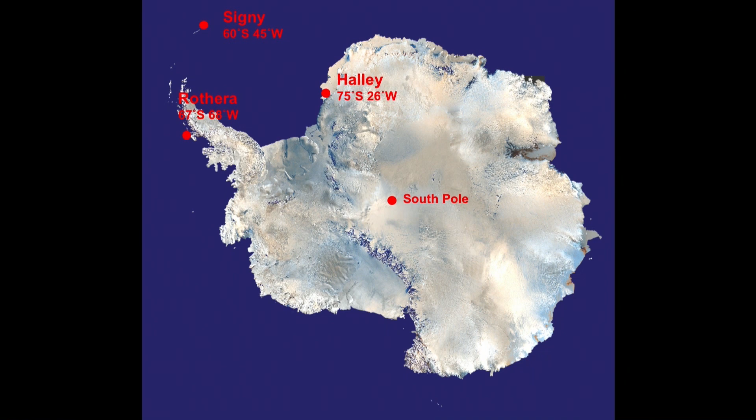So there needs to be much more storage on the base. They need bigger wharfs and so on. So our role has involved looking at infrastructure and very simple buildings at both Signy and at Rothera. So this is Signy Station, which is a very beautiful site, more or less in the sub-Antarctic.

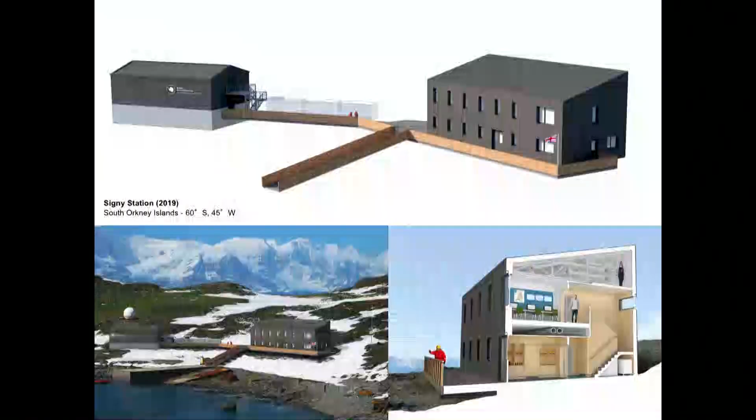Again, only used in the summer, where we've developed just a very simple timber building lined in timber with all the living space on the upper level, and then all the science space, waste management and so on in the lower levels, and then kept one of the existing buildings and reclad it for the power generation, sewage treatment and so on.

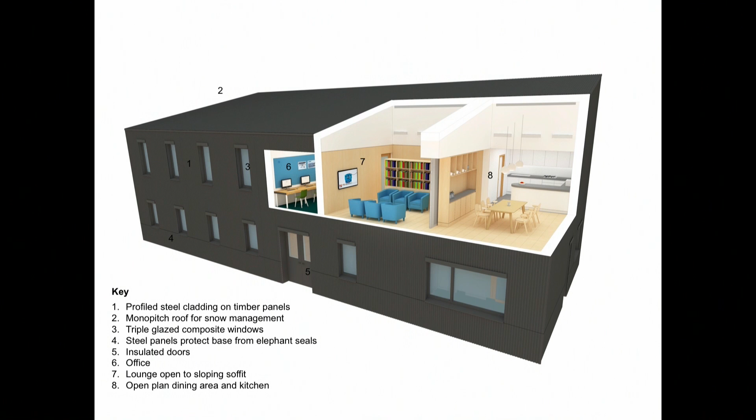And yeah, just a very simple, almost like a kind of Scandinavian house or something you'd find in the New Zealand or Australian outback, I guess.

And then at Rothera Station, which is Britain's largest station, which has a summer population of 100 people, again, there's a move to improve storage, improve the operation, and the building there is very, very simple, actually not really a kind of Antarctic building, but highly insulated, using solar power, incorporating air traffic control, and so on.

And then our most exciting Antarctic project of the moment, which is in its infancy, is the redevelopment of New Zealand's Scott Base. So you may remember the early historical slides showing Sir Edmund Hillary's hut, the one that was a kind of fawn and orange colour.

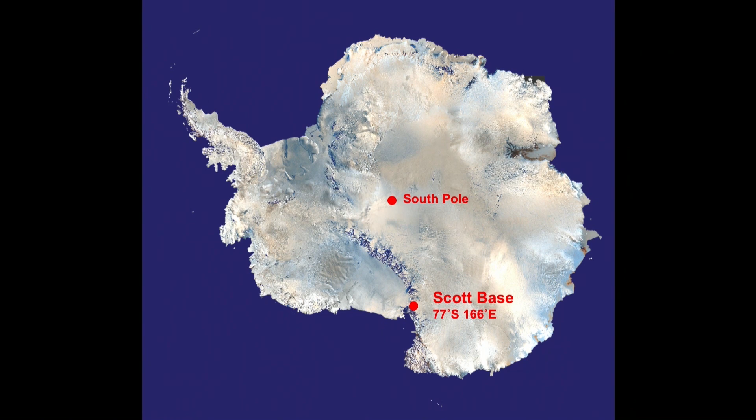Well, Scott Base has been New Zealand's base in the Antarctic since 1957, now supports a summer population of 86 people, and has science expeditions heading out from the base right across the Ross Ice Shelf into areas such as the dry valleys, which are amazing places for carrying out science research. This is an image of Scott Base. So that very first building is one of those smaller buildings in the foreground.

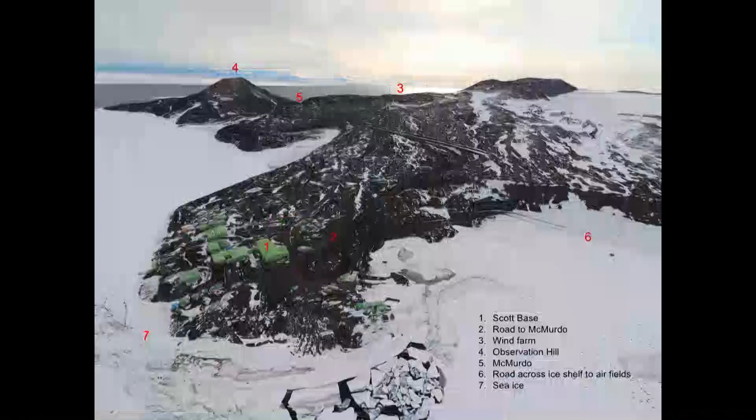The base was significantly redeveloped in the 1980s, and then there was one building added in 2004, but has had no redevelopment since then. But it's in an incredible site right next to the sea ice, where the sea ice meets the Ross Ice Shelf, with Mount Erebus in the distance. I was there actually only 3 weeks ago, and we were up in the helicopter just taking some photographs down on the site, just checking out the topography.

It's quite a challenging place to build, because you've got to keep the existing base. It's on a sloping site. You can't get too close to the sea, but there are plants that grow round and about that we have to be mindful of. And then a big road which leads from the US base McMurdo, the largest station in the Antarctic, out to their airfields, following that road at number 6.

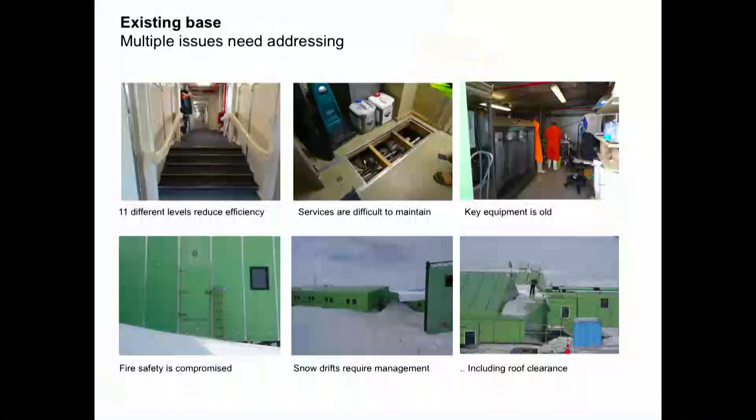And these are some of the issues to do with the station. It's on multiple different levels. Much of the equipment is really old. The services are really difficult to get at. It's got poor fire safety, snow drifting all around the site. These are all different constraints. So people always think, oh, building in Antarctica, there's no constraints. But actually, this is almost as complex as building something in a city centre, because there are so many different parameters that we have to consider in the design.

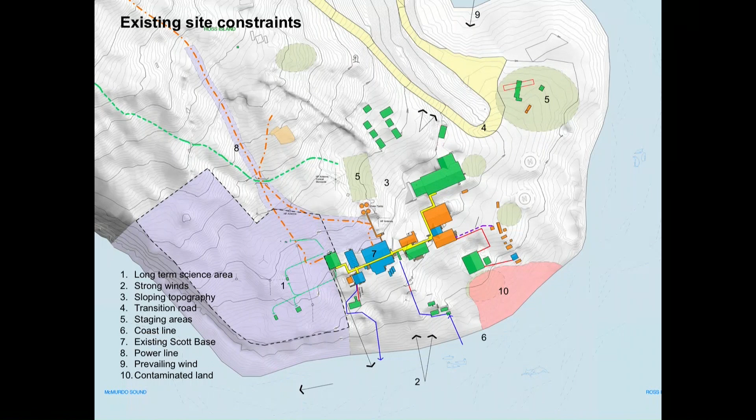In developing our proposals, not only have we thought about our previous work in the Antarctic, the previous work of other architects in the Antarctic, but also started looking, I think, a lot more than we did before at things that have been successful in the Arctic. And in the Arctic, of course, there's many more architectural examples to draw upon. I love these two that I'll show you now.

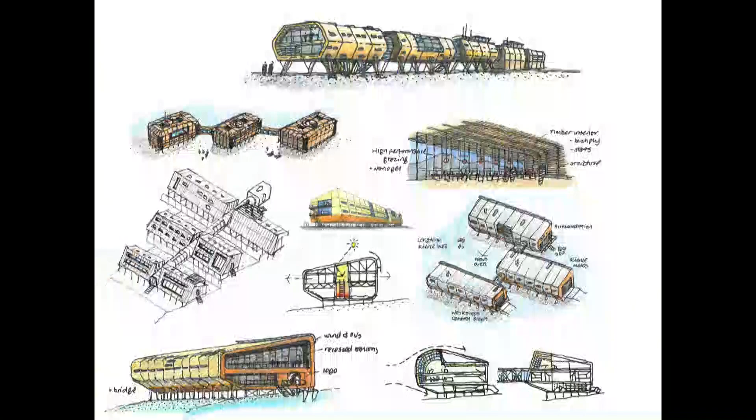And then here's some of our very early sketches of what we may or may not be doing at Scott Base. And I think with that, that's a pretty rapid run around the Antarctic. I hope that's given you an idea of the practical side of building in Antarctica. And thank you very much.

Wow, it was really, really impressive. Thank you very much for this very, very instructive tour of Antarctic architecture. I'm Francesco Bandarin, the co-director of the Polar Lab. And while you prepare a few questions, I think we have maybe 20 minutes before 8 o'clock.

I have one question. As you know, we're trying to look at all the facets of architecture in Antarctica. We started with the early settlements, even archaeology, and then the heritage. What is heritage? The huts. You showed some of them. We looked at the second big phase of construction, which is the 1950s and 60s, with the scientific stations and so on. And then we look at the third wave, which is the 80s and 90s, when more people, more countries came to the Antarctic Treaty.

And now the fourth wave is Hugh Broughton. Now, as time goes by, and because the erosion of these buildings is very fast, they are removed, or some parts of it become heritage.